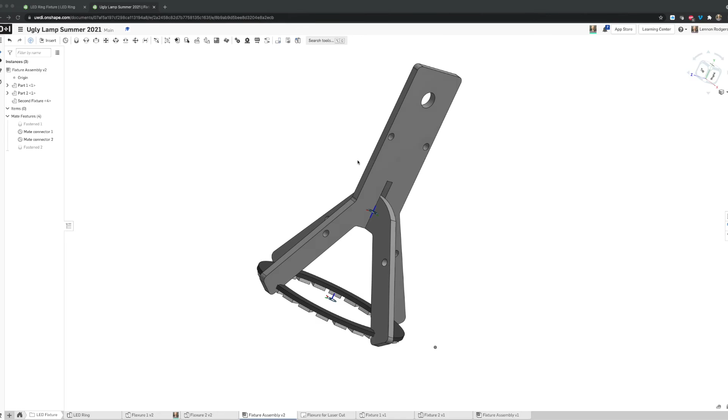Okay, this is the part we will make right now, a little fixture that holds the LED ring. I've modeled the LED ring ahead of time, so I'll give you that to start, so you don't have to make it. But we'll be making these two pieces here. Let me hide some of the pieces so you can see. So that's one piece, and then we'll be adding the second piece there, and that's the LED ring.

The first thing you'll want to do is open up the file called Ugly Lamp Given Parts. Then down here, you'll want to find the LED ring. So that's right here. You'll want to right click and say copy to clipboard.

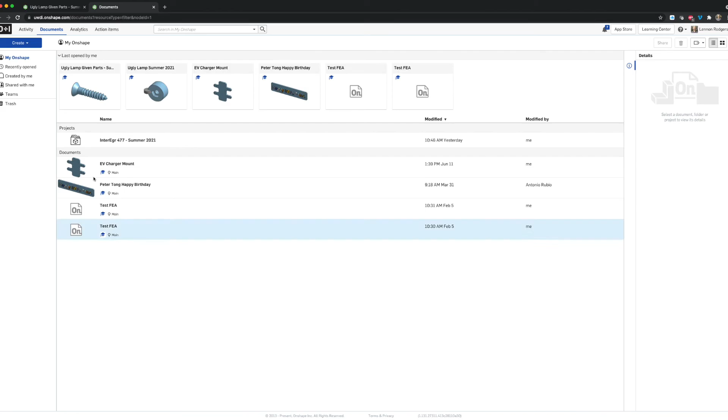Then you can go back to your documents. If you haven't already, you'll want to create a new document, and this will be for the LED ring fixture. This should be either an empty file or you can insert it into an existing file. Then you'll come down here and hit the plus and say paste tab, so that will put the LED ring in there. That just saves you from having to make that ring again. I've made that ahead of time.

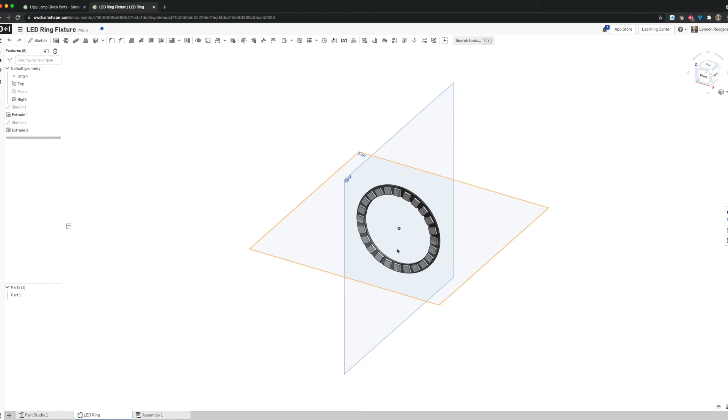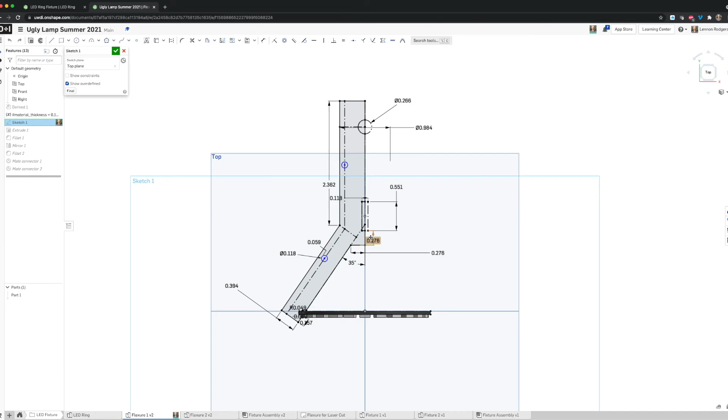This is the first piece we'll make as part of the fixture, and I'll show you the sketch here. So we'll be making half of this arm, and that's a technique that's very useful if you have symmetry in your part. You'll want to sometimes just sketch out half of the part and then use some mirror features to mirror the parts or the sketch entities through some type of center line.

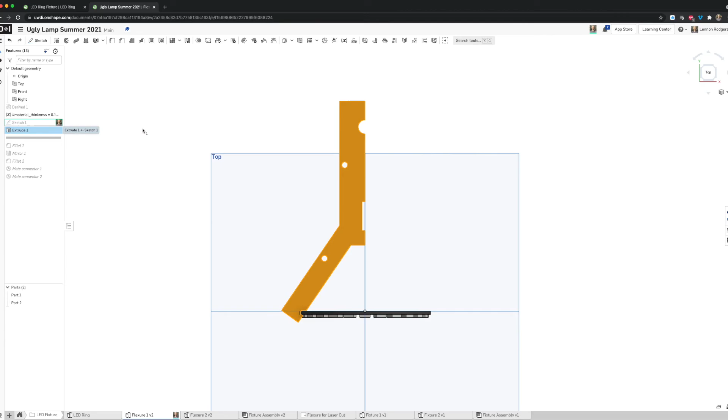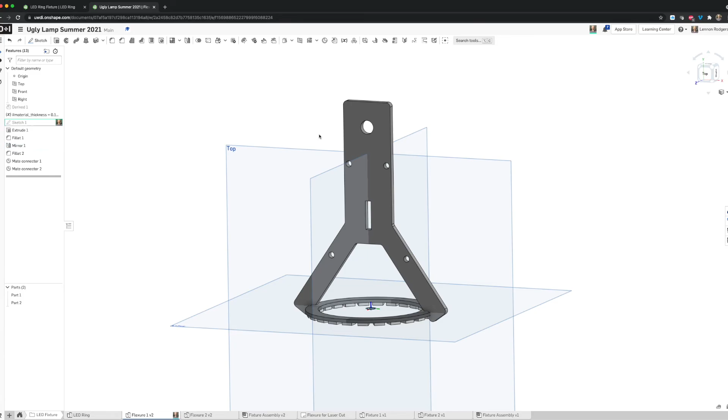So we'll create the sketch. Let me see if I can roll back to here. So we'll create the sketch and then create an extrusion of that sketch. We'll just take the sketch I made, extrude it out, and then use a mirror feature to mirror half of that sketch, and then you'll get the full shape here. Then we will add some fillets, which are just little rounded pieces, and other things to smooth off the edges. These mate connectors are needed for the assembly.

First thing you'll want to do is create a new part studio. So go in here, create part studio, and then you can rename it as fixture 1, LED fixture 1.

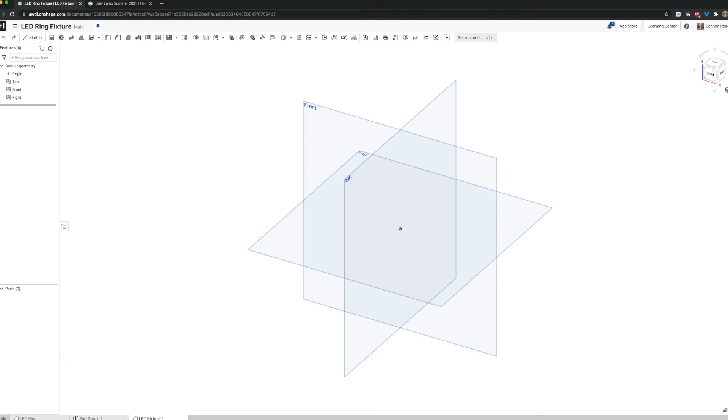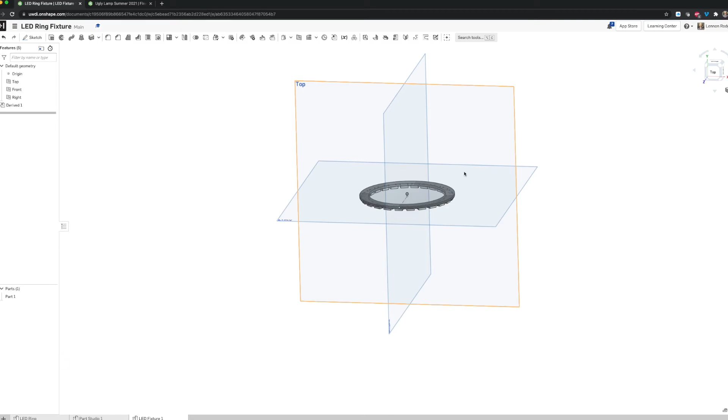What we want to do is bring in the LED part that we had just imported or pasted into this file. So click on this button here that says derived, and then you can select the ring, and that should bring it in, and you say okay. So what that's done is essentially directly brought the LED ring into this file. If I make changes to this LED ring file, it will update and everything will stay according to this same part file.

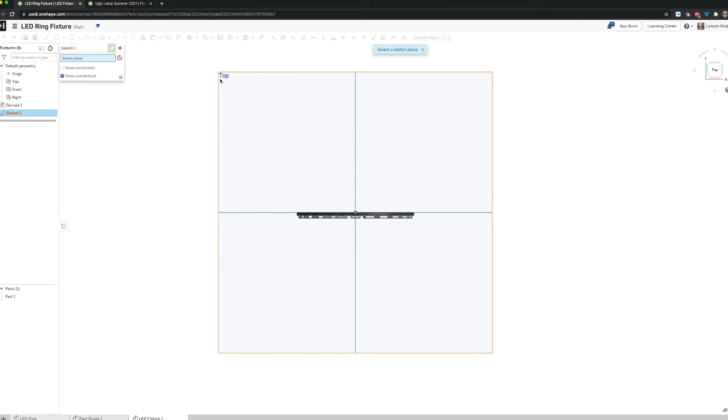So that's what I want to do. Now you can see in my tree over here, I have the derived LED ring. So the next thing I want to do is create a sketch. I click on sketch, and then I'm going to click on the top plane for my sketch.

The first thing you're going to want to do is just use the line tools. Here's the line tool here, and make sure that you click the construction button too, so that the lines are dashed. You'll want to sketch out this basic shape. The reason why I use construction lines, I think of them as the skeletal system of your CAD. I usually create the core shape using construction lines, and I dimension those lines, and then I essentially put a wrapper around them of the actual solid lines.

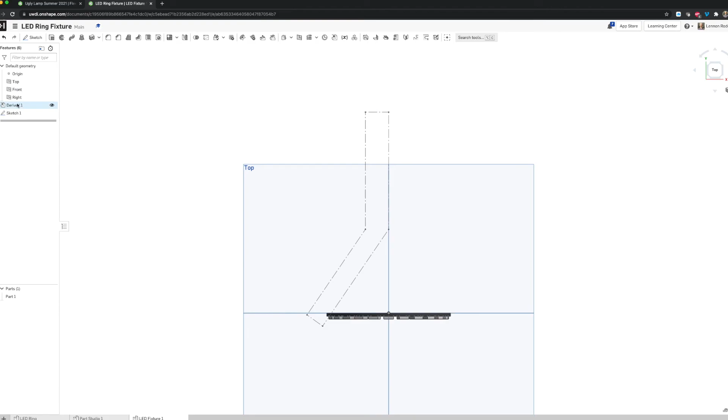I think it will make sense after you have some practice of why I do that. So you'll want to sketch these out. Some of you might have your units off, they might be in inches. You'll want to come over here and go to this horizontal line option, workspace units, and change from inches to millimeters, and then say OK. So double click back into the sketch.

You'll want to add the constraint that this line is the same as this line. So you highlight both of them by clicking one, then holding shift and clicking the other, and hit the equal constraint here.

You'll want to add this dimension, so I'll delete it and add it back. To add the dimension, just click on the line and type in 60 millimeters.

Then you're going to want to add the angle here. To do that, click on the dimension button, click on one line, click on the other line, and type in 35 degrees.

And for this one, you'll want it to be 10 millimeters. Just click on that line, get the dimension button, click on that line, and dimension it to be 10 millimeters. What's interesting is that since it's not fully constrained, you can drag it around quite a bit.

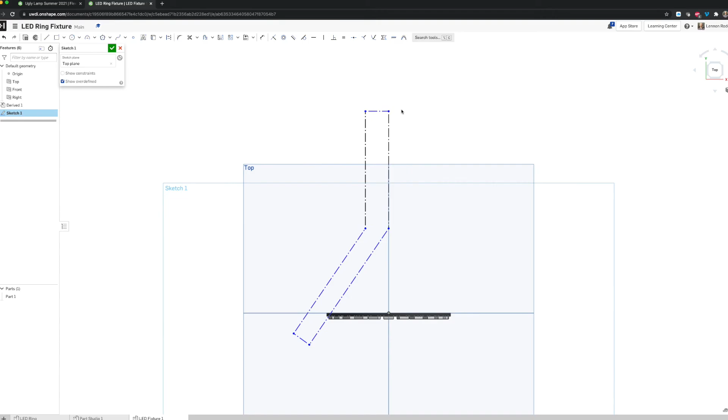So we'll end up adding some other constraints and dimensions in a little bit. Now you zoom in here, and what we want to do is use some of the geometry from this LED ring.

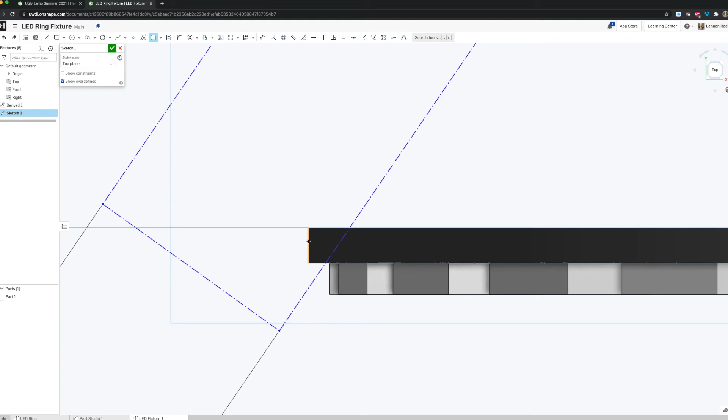The way to do that is to use this convert button. You'll come over here, grab that, and come over here and click on that edge. Now I'm going to hit escape, click on it again, and turn it into a construction line.

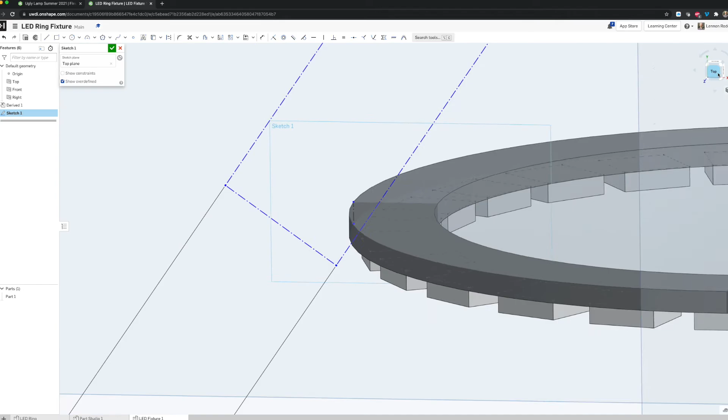So now I have this construction line that's the edge of that LED ring. You could probably see it there, and you can kind of see as I zoom out what we have. It's really nice that you're able to use some of the geometry from that LED ring.

The reason why, as you'll see here, is that we're going to create this arc, basically the little notch that's going to hold in the LED ring. So we're going to come up here and get a 3-point arc.

So you have these different arc options. You get a 3-point arc, and you'll come down here, click there, and click here, just trying to create that arc like that.

Okay, and I'm going to come back here and reference. We want this arc's center to be right on the center of the LED ring, which makes sense. So I'm going to create a center line that comes directly out there and goes to the center of that arc.

And then I will want that to be horizontal. Basically that puts the center of the arc at the center of the LED ring, and you can always drag it around and see how the shape changes.

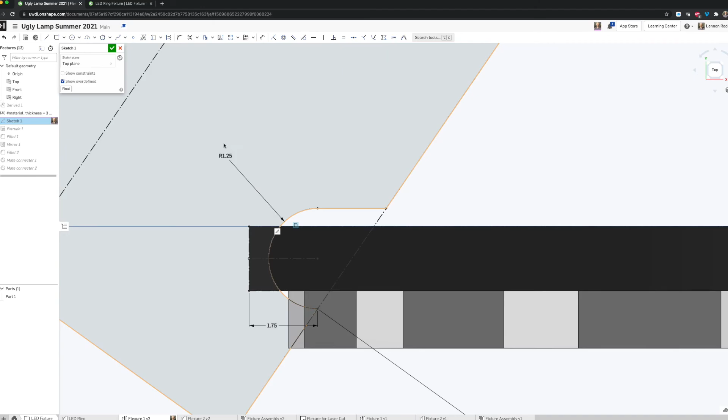Here I've dimensioned it as 1.25 millimeters, so let me go ahead and throw that dimension in: 1.25 millimeters.

And then I will want to extend this line in, because that's what I have here. I want it to come in all the way there.

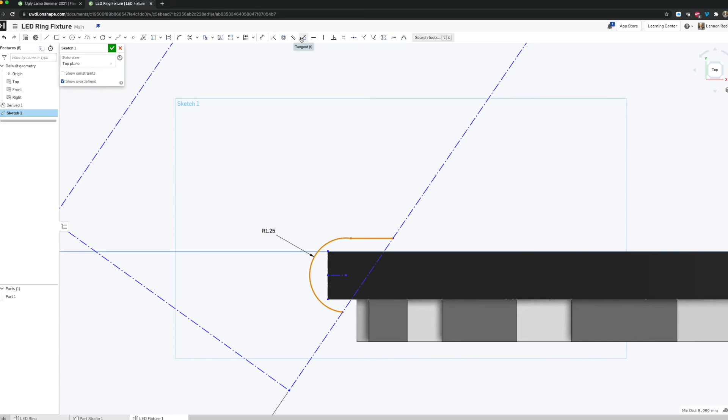And I'll want to make this line tangent with the arc. So I select the line and the arc, then I look for this tangent constraint, and that should do that.

One thing I noticed was that when I converted this line over from the LED, it's unconstrained still, so I need to add a constraint. I need to click this little dot, then click this line, and hit the coincident constraint.

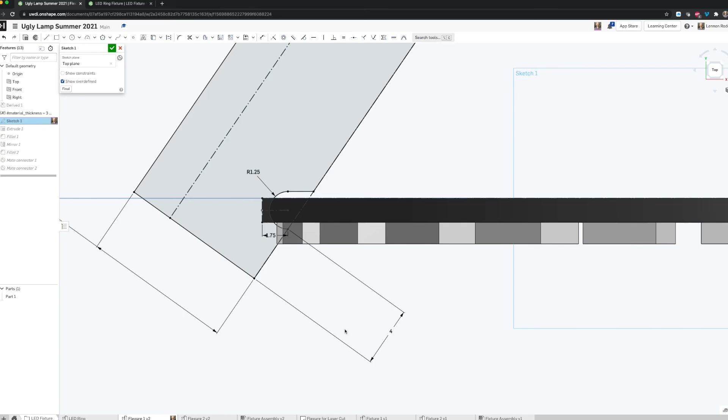And see, that turns from blue to black, so now that's fully constrained. Now I need to add a couple more dimensions, so I'll add that 4 millimeter dimension here.

So I'm going to go ahead and fill this line in because I'm going to be drawing a solid line in there in a little bit anyway. And then I'll go ahead and dimension that line, holding this, to be 4 millimeters.

Okay, so another issue that I had can be solved by making a hidden line or construction line that goes from the top here down to the bottom of the arc, and then clicking on that and making that vertical. You can kind of drag on it and see, but this essentially constrains the arc the way we want it.

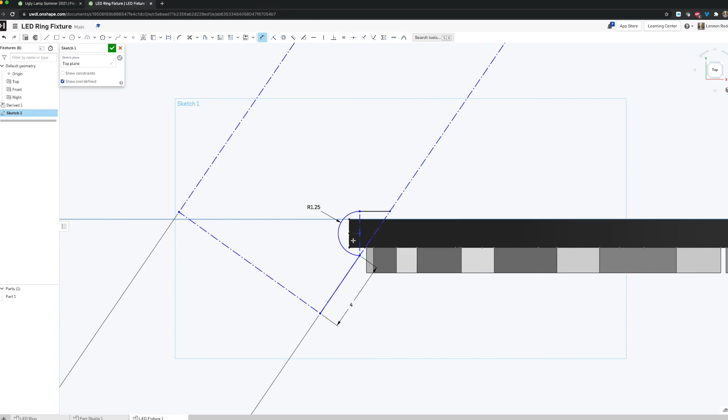And then we need to add a dimension for basically the back edge of the LED. Let me get the dimension—there we go. We want that to be 1.75.

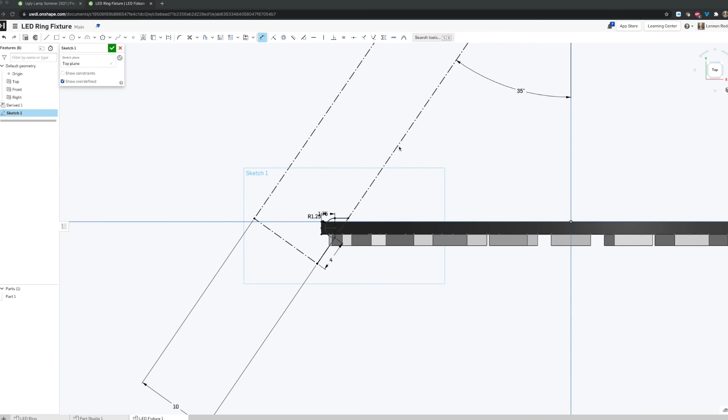So what happened there is pretty much all the lines and points turned from blue to black. That means everything at this point is fully constrained.

So this is the overall shell, the skeletal system we need for the CAD, and you can see here that this is what I eventually want. I need to add this horizontal piece, so I'm going to go ahead and add that, and then sketch around with solid lines.

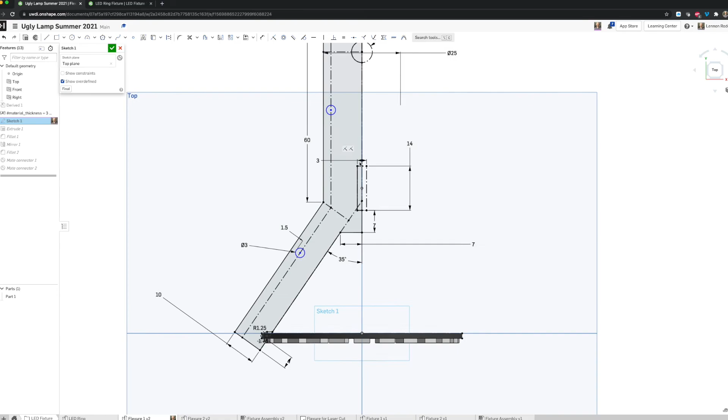The overall shape. But I also need to add these circles and this rectangle, so let me go ahead and do that too. Let me add these.

So I can come up here and create a solid line. It's going to go from here over to here. And then it looks like we want that dimension to be 7 millimeters across.

So I come here and dimension it 7 millimeters. Okay, and then I need a circle up here, and the circle placement looks to be just along this line here. So it looks like I can create first a hidden line or a construction line.

So grab the circle, go construction, create the circle here. And then the question is, how is it positioned? I think what it is here is that it's equal distance from each side, so the length from here to here is the same as the length from here to here. That's kind of a geometric constraint.

So what I can do is create a line that goes across there and make that a construction line, and then make another line that goes from here up to the top. I click on that one, and then I hold shift and click on that one, and then I make them equal. And that will position that circle.

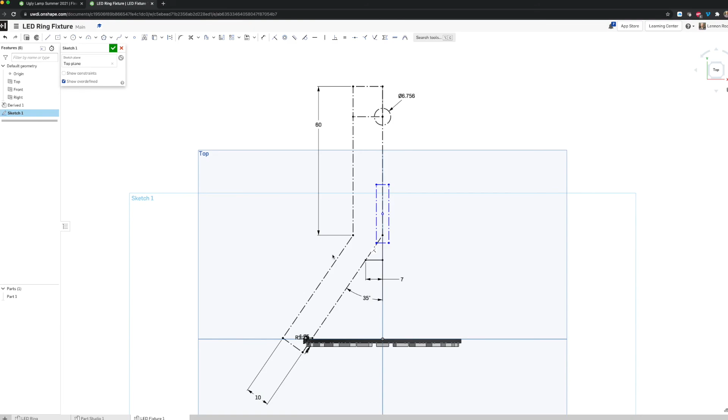And then it looks like I can just click up here and create this rectangle. And then the dimensions are set by the bottom of the rectangle being 7 millimeters up from this line there. So dimension that to be 7 millimeters.

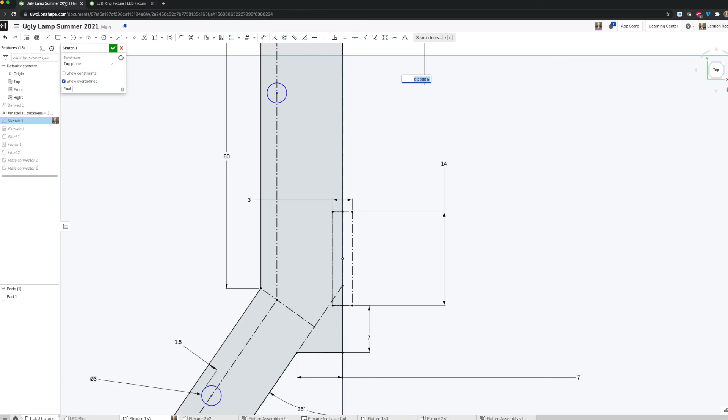And then the overall height is 14 millimeters, and then the width is 3 millimeters.

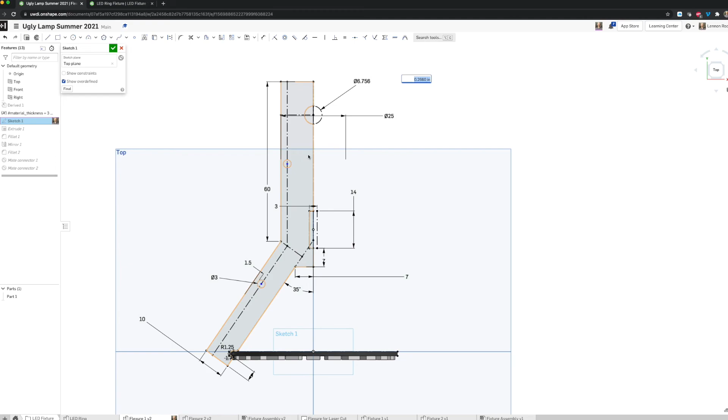Okay, so now I need to come through and add the solid lines, because I believe here I now have all the key dimensions already specified. So let me come back here and just sketch over these hidden lines with solid lines. I come over here, come down here, and just create the lines.

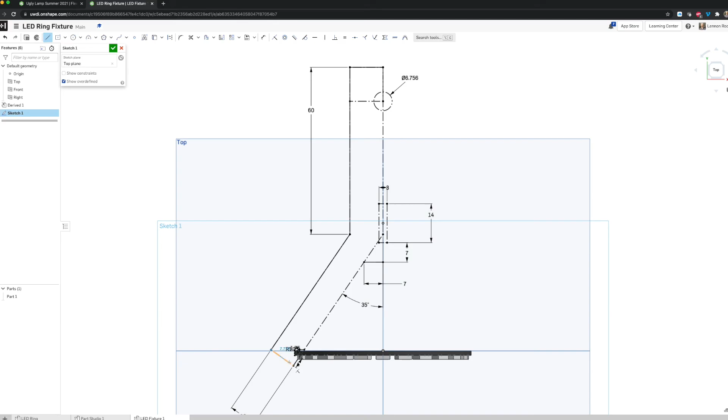I have to zoom in here. Well, I've already made that one when I dimensioned it. So I click here, going up to this line. That one's already a solid line. So I come up here, there, and then I just trace out.

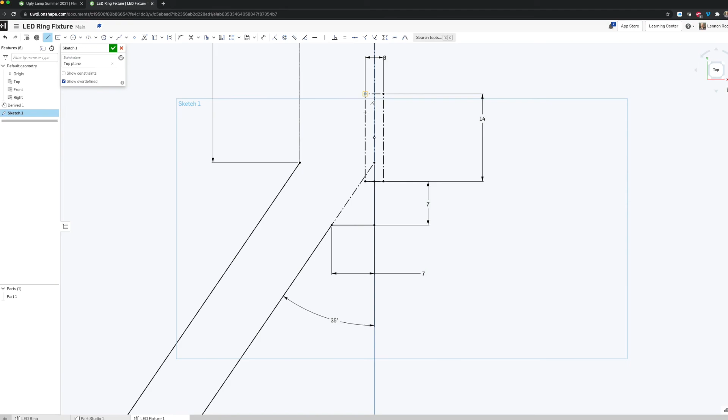So that's why these construction lines are really nice. Let me make sure that I got that one. Yep, I did, but I'll try it again now.

Okay, and then I want to create that arc. So to create the arc, I can do it a lot of different ways, I'll just do...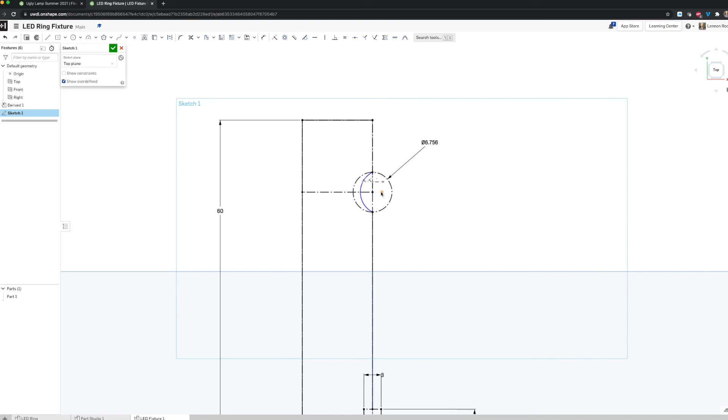Let me try, it should be a 3-point arc, so I should be able to click here, here—oops, let me try it again. Let's click the arc. And then I can left click and drag that right into the center. And then you should have all black lines and arcs.

Okay, now that we have the sketch, we want to make the extrusion. In order to extrude a sketch, you should see that it has to be grayed in. So if you don't see the gray that encloses these outer lines, that means one of your lines in there is still hidden and not made solid. So you have to add that solid line, and you should see this gray.

Once you've done that, you can click on the sketch and then hit extrude. There are a lot of different options up here for extrusion, so you can do new, you can do add, and so on. We want to do a new one, going 2.5 millimeters in one direction, but we actually want it to go in two directions to be 5 millimeters total. This is just kind of a minor detail.

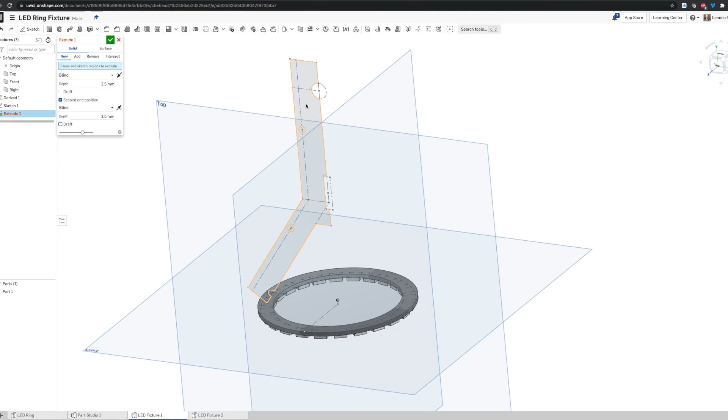So I can click on the face of that sketch, and then I say OK. So that looks pretty good.

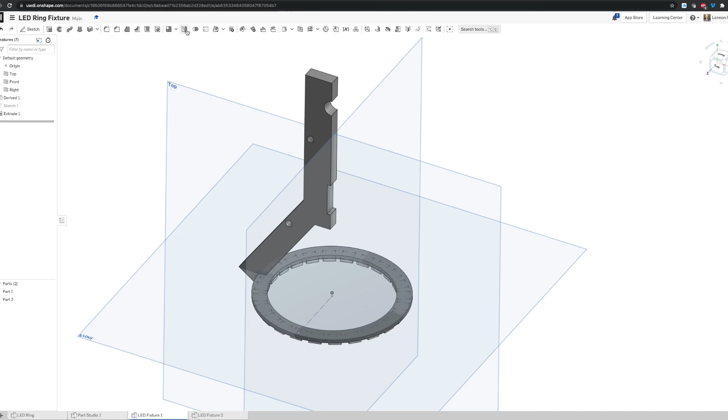Now I want to mirror. So I go to the mirror feature, click entities to mirror, click on that, and the mirror plane is here. Then I want to merge with part 2.

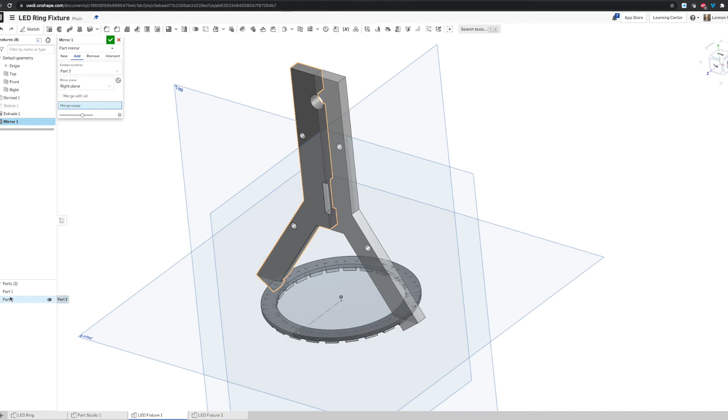In the settings here, you can see new, add, and remove. In this case I want to do add, and merge with part 2, because that's the other half. So now it's a solid.

You should really just have down here in your part tree, part 1 and part 2. Part 1 is the LED ring, and part 2 is this part that we just added. So that looks pretty good.

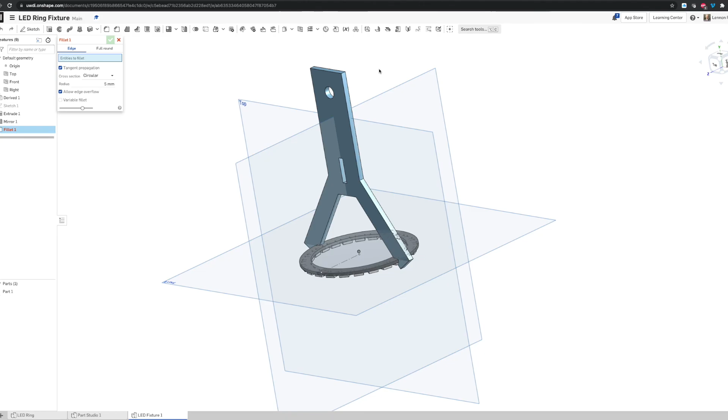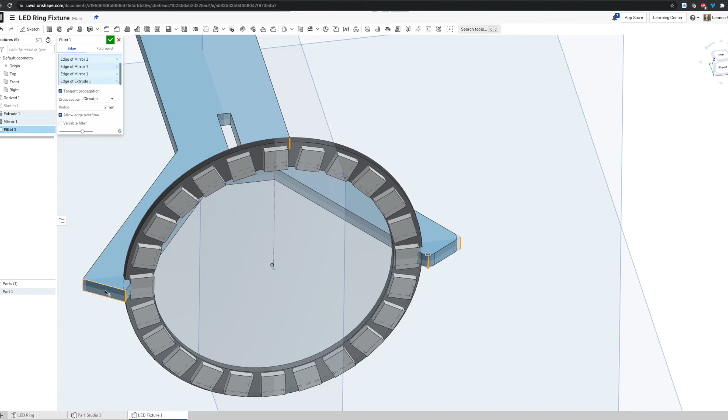Now I'll go back and put some fillets, just rounding the corners. I click the fillet, and then click on the edges that I want. You can put 2, 3 millimeters, whatever you'd like, and experiment with it. Just click on the edges that you want rounded. I could have done this before I mirrored it if I wanted to.

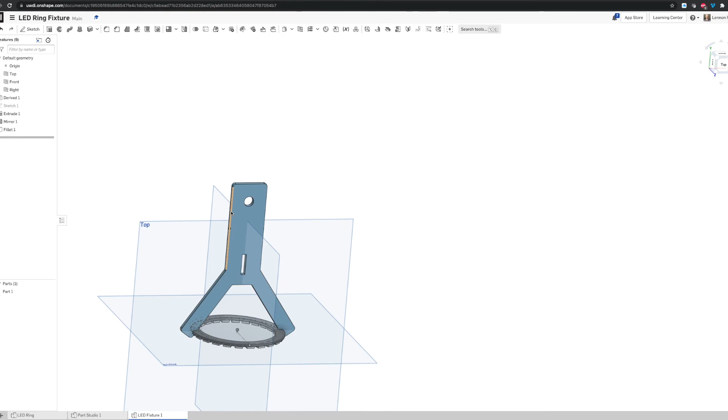I'm going to go back and add these holes on the side, which will be used for zip ties, to zip tie your wire. This is just an example of how you can go back and edit a sketch. So I double click on the sketch and zoom in there.

I can come in here and make some construction lines across that one. Then I want to come down here, and it doesn't have to be specific. Like I said, these are just for zip ties, so just put in something reasonable.

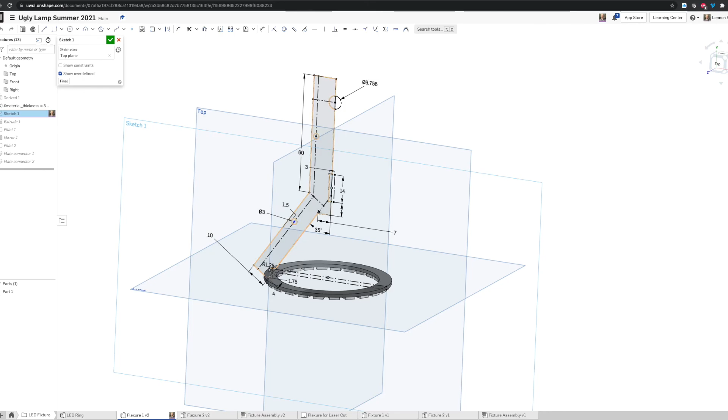You do have to add a couple of constraints here. You have to make these two lines parallel, so come up there, parallel, and then you do have to set the distance from the edge. In this case I had 1.5 millimeters from the edge and a 3 millimeter diameter circle.

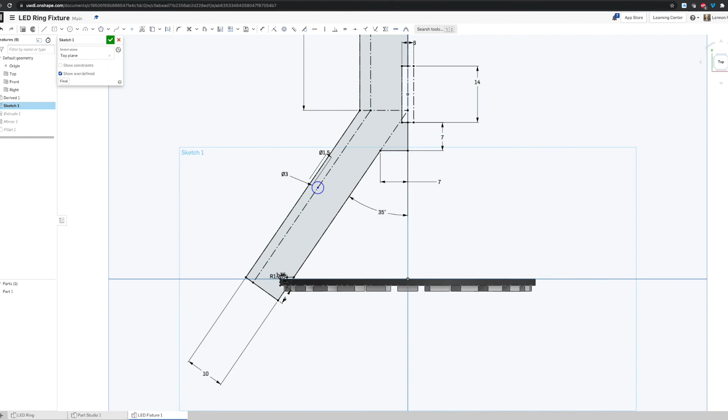So I need the circle in there first. I come in here and dimension this to be 3 millimeters, and then dimension this to be 1.5 millimeters from the edge. This can be dragged anywhere - I didn't really even specify it in my file because it's just approximate. You can just put it up here, where the zip tie will go.

And then we need another one up here at the top, which looks like it's kind of on the center line. So I can create a circle and put it right in the center, then make this one equal to this one down here - highlight both and hit equal. That should do it.

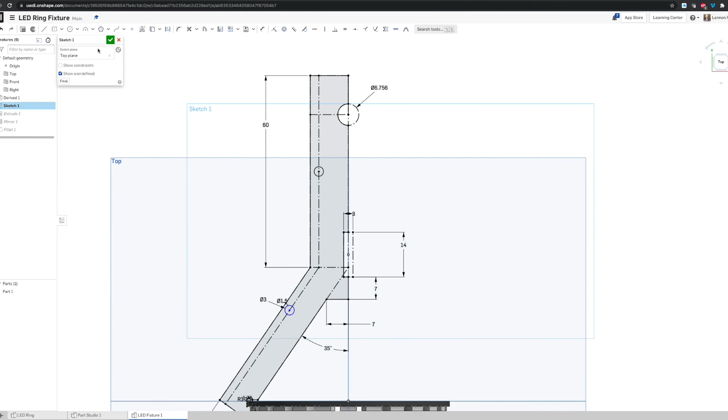If I say OK, the holes will already populate on both sides because of the mirroring. That's a nice aspect of it.

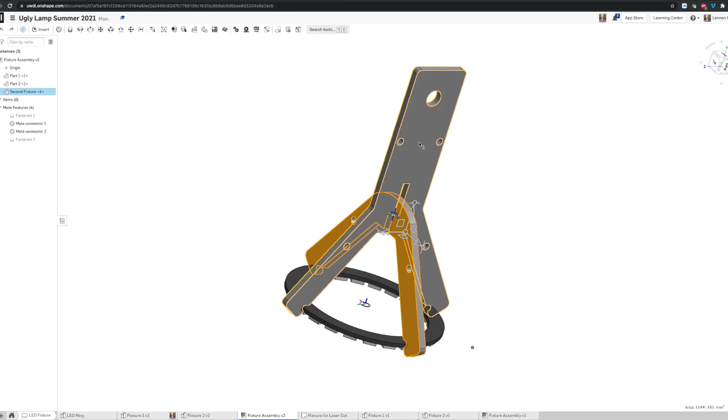The next part we're going to make is that second piece. I can look at the assembly here - it's this piece right here. We're going to make it based on the same geometry, leveraging what we've already made to create this second one.

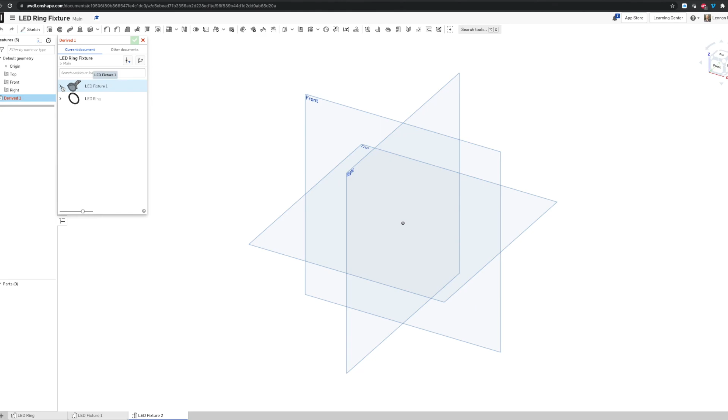So you'll want to come over to your part and create a new part studio. I'll call this LED Fixture 2. Then I'll do the same derived feature as before - click the derived button, which is here. That pulls in the geometry of part 2, which is what we want to bring in.

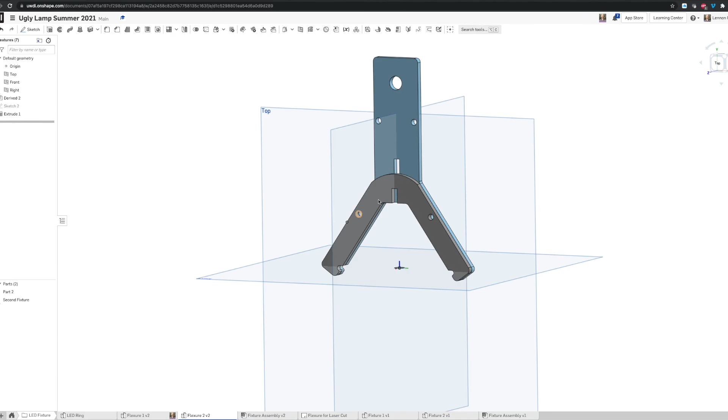This allows us to essentially utilize this geometry, and you can see this is what I did over in this part. I'm going to build the second piece right on top of that first piece, but in the end we'll only use this piece. It's a really slick way so I don't have to recreate the whole geometry. So I'll create a sketch on the face of this part.

And then what I want to do, I can do this a couple different ways, but essentially I want to extract the curves from this shape that we've already created. So it's that same use tool, and I can just click individually through them all, or I could just highlight them all and it will get them all. So I can go ahead and do that, click that one, and it gets all those. I think it got all of them.

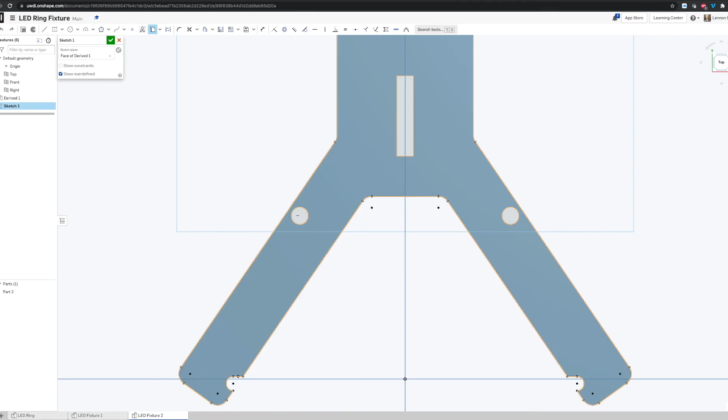I'll just want to also get these other lines. So let me click on that again. I want to get the circles. So I think we're good there.

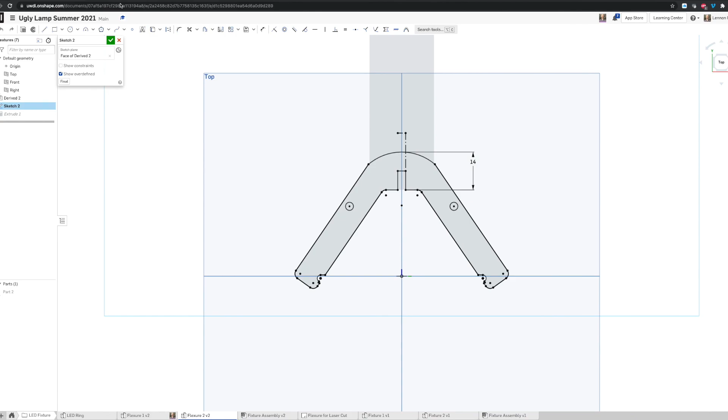And I want to convert this line to be a hidden line, and I'll show you our construction line, because I actually want to modify that a little bit. So there's that, and then I want to add an arc, and this will all be apparent in a little bit. So add the arc there, and the dimension I want to give that is 14 millimeters. So I'll dimension that from the arc down to this line, and we want that to be 14 millimeters.

So the next thing I want to do is add this little notch that will slide in. So I create the rectangle, and then I made that hidden so I can fill in this line here.

Okay, but as of now, this thing should be able to slide around. So what I want to do here is create two constraints. One is that this should be coincident with that line, and that will bring them lined up, essentially collinear. And then do the same thing on this line. Select these two lines, and then make them collinear.

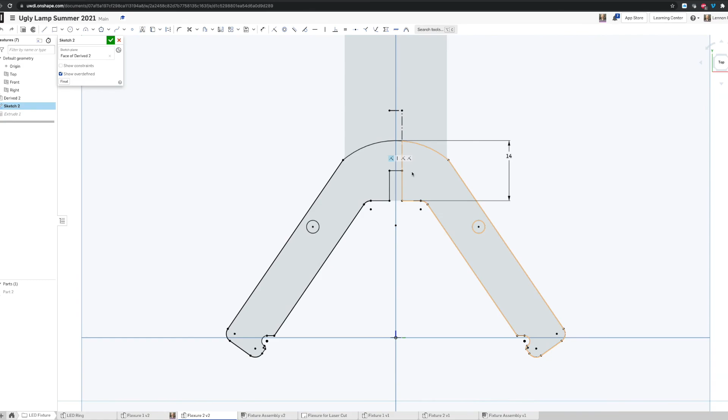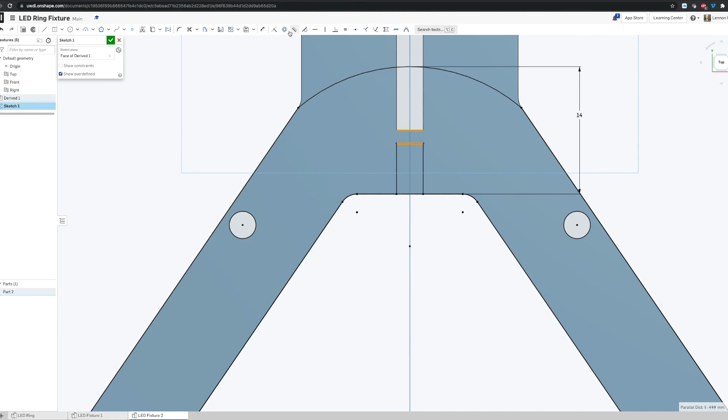And then the final dimension that I need here, let me see if I can see it. Yeah, I want this to come all the way up to the very bottom of this, all the way up here. So the way I can do that is click that line, and then make them coincident. So that's this coincident constraint. And then everything should turn black.

And it does. So if I say OK, I can now create an extrusion, clicking the extrude button, and then I can click on the sketch. And then it turned red, I think because it says add, and I actually just want to do a new part. I don't want to add to this back part.

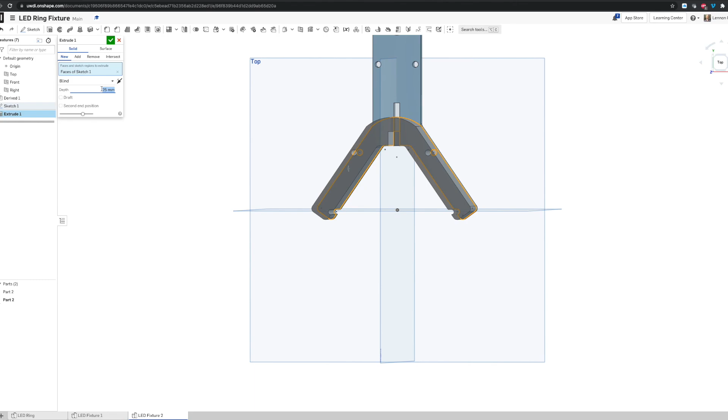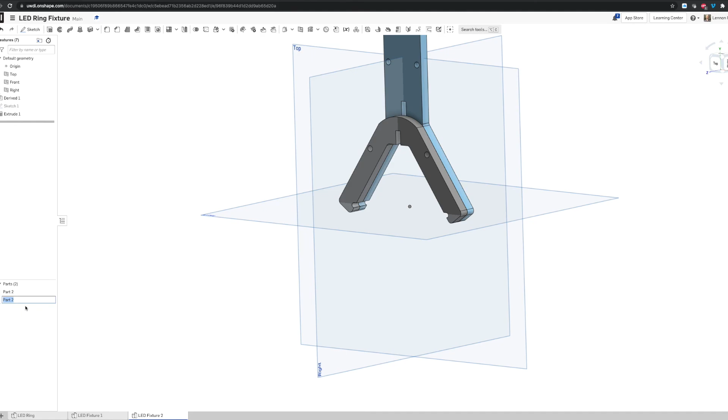And then, like before, I can do the 2 directions, or just the 5mm. So I'm just going to do 5mm for the thickness, and then do that. So you can see here that I have 2 parts. That's the back one that we started with, and this is the new one that we created. And I could rename this part as Fixture 2, so I know which one it is. And then I can hide this one by not showing it.

Okay, next I'd like to be able to make this assembly. So to do that, you need to use mate connectors. This is what it'll look like in the end. I'm going to go back and show you how I did this. So to make the mate connectors, they're basically the points at which you want to connect 2 parts together.

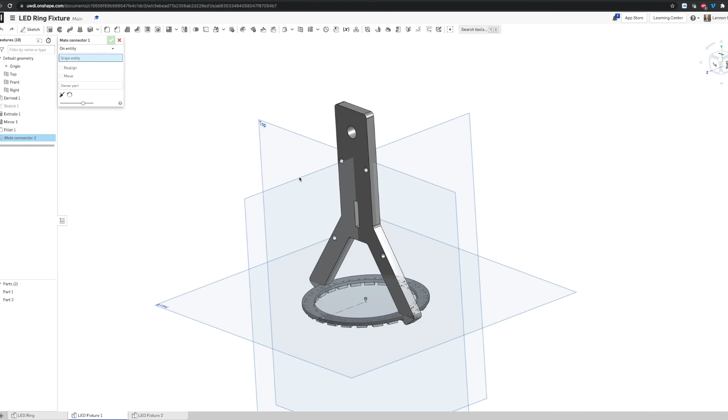So I need to first create a mate connector in my individual parts. If you look up here, you can see this mate connector. And then you can click there, and say owner part, and I want to put this in part 1. So I click part 1 and say OK. And then I create another mate connector.

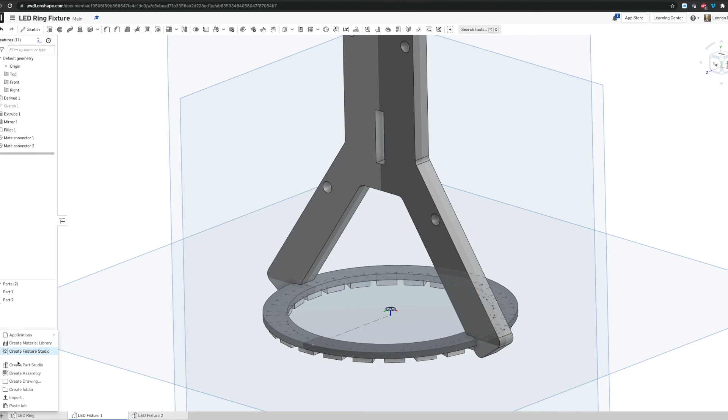Actually, do the same. This will make sense a little bit later. And then I want to say OK. And then I can come down here and create a new assembly. An assembly is essentially putting multiple parts together. And I can say insert, and click on that and say OK.

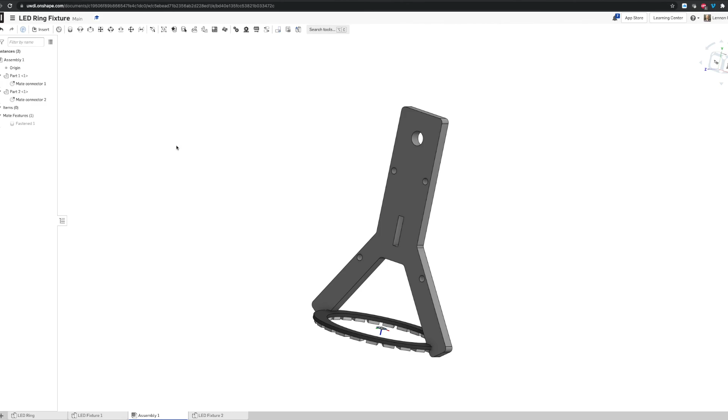And then I'm going to want to add these mates on there. So I'm going to do the fasten mate, and I'll do mate 1, fasten to mate 2, say OK, and then I'll insert the other part, which is this LED fixture 2. And actually, I just want to bring in fixture 2. I don't want to bring in this one, so I'm going to delete that.

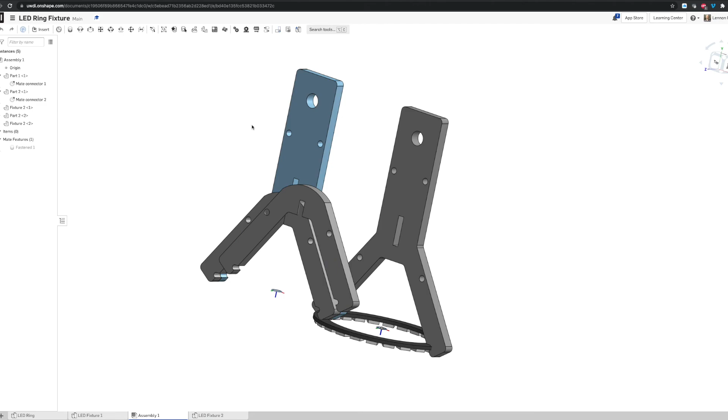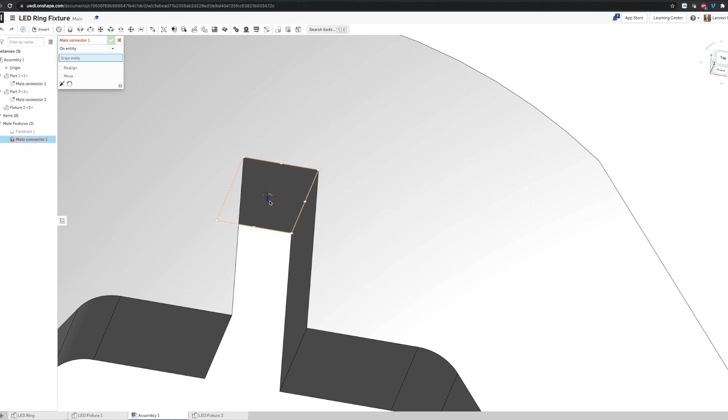Let me see. Okay, so this one got brought in. I'm just going to delete this, and delete this one. Okay, and then what I want to do here is I need to add a mate connector up here, because I'm going to mate this surface to that area over there. So I add a little surface mate connector there. Say OK, and then come over here and create a mate connector in there.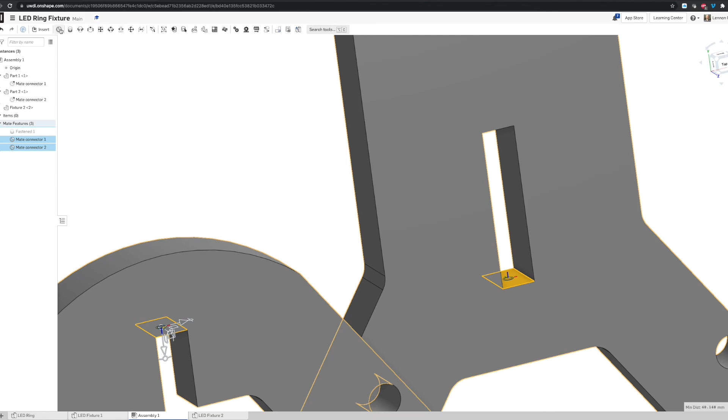Say OK, and then I can take both of these and do a fasten, but I need to rotate it around. So I do that rotate, and then say OK. So this is the assembly.

What's good about doing that is you can see here that this thickness is off, so this must not be the right thickness. I'm going to go back and change that. I'll go back to the individual parts, go to LED fixture 1, and look at this extrusion - it looks like it was 5 millimeters.

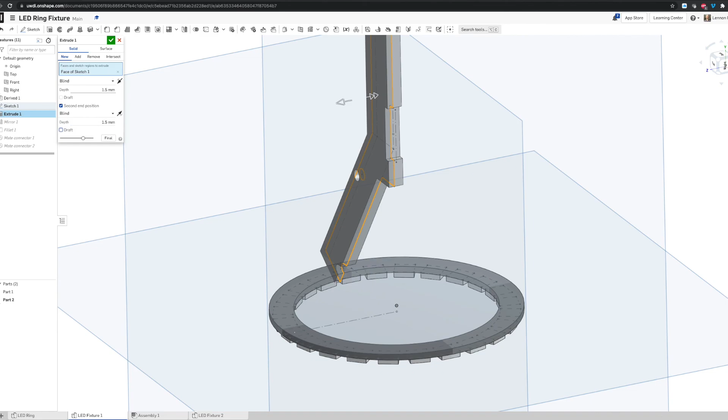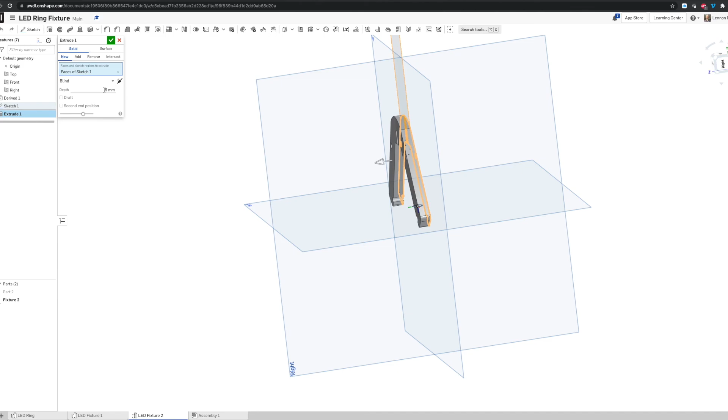It should have just been 1.5 millimeters in each direction, which will be 3 millimeters total. So I can change that, and then I come over here and I want to do fixture 2. So I go to fixture 2 and look at that extrusion, and that must be the same. Yeah, and I really wanted 3 millimeters. So sometimes you make these errors, and it's nice - you can come back and check it and do a quick update. So it automatically updated, and you can see here now it all fits together.

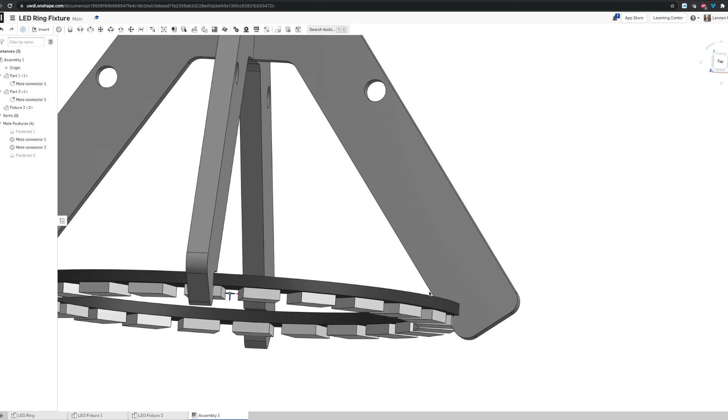You could analyze it more, make sure everything's correct. You kind of come down here, and this looks correct, even though it's interfering there. It's actually what allows the LED ring to be held pretty tightly as it kind of flexes back and then pinches it really well.

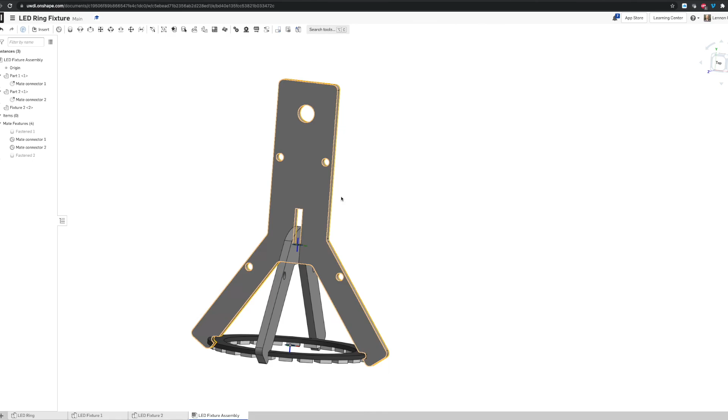So I can rename this as LED fixture assembly. And the next thing I want to do is create a two-dimensional drawing that I can use on the laser cutter to cut these two files.

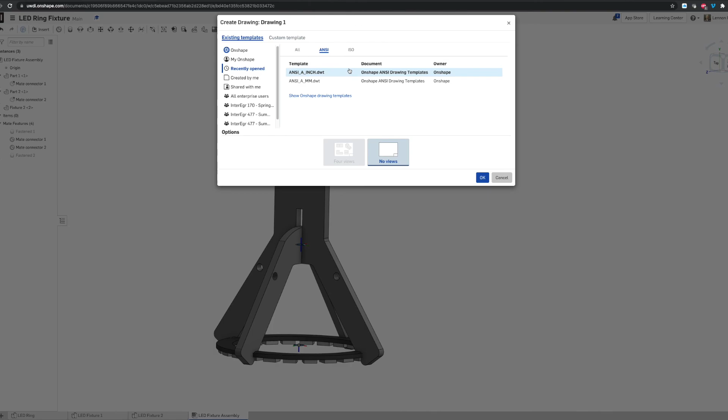To do that, you go down here and click Create Drawing. These are the different template sizes, so it kind of depends on what you've made so far. You can go to ANSI and ISO - I'm going to just click on one of the millimeter ones. It doesn't matter, you can check what the different sizes are, because we're going to delete everything anyway, though the overall size changes for the different template sizes.

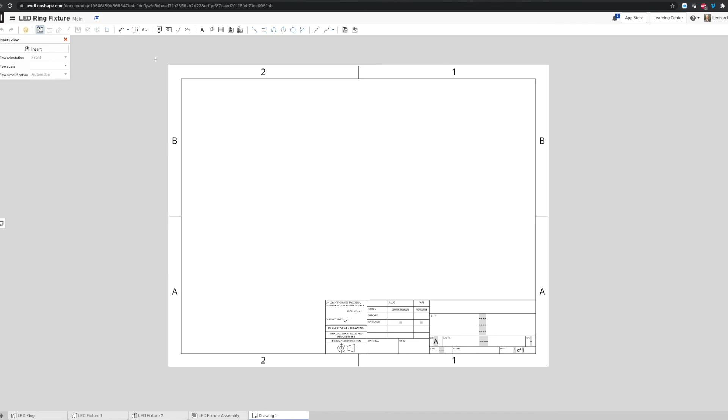So I'll exit out of this. Imagine you've got this drawing here. I'm going to first delete everything, just getting a blank sheet, and then I'm going to insert, and then I just want part 2.

Now you can see here that you got to check to make sure the scale is 1:1, and then you got to change the view orientation until it gets to the large rectangle. That's kind of what we want. That's just switching to the different planes.

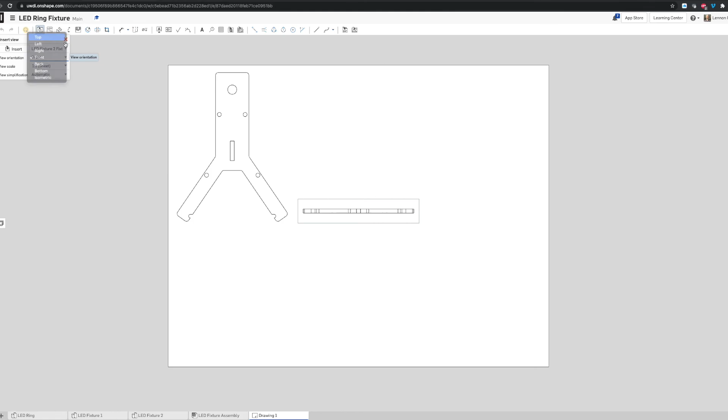So you click there, left click, accept that, hit escape, and then insert another part - I want to go to the LED fixture 2, click that one, and again make sure it's 1:1 scale. It looks like the top view is what we want, and just position them pretty close to each other, because we'll be cutting them on the laser cutter. You could also nest them down like that, so that might be a good way to do it too.

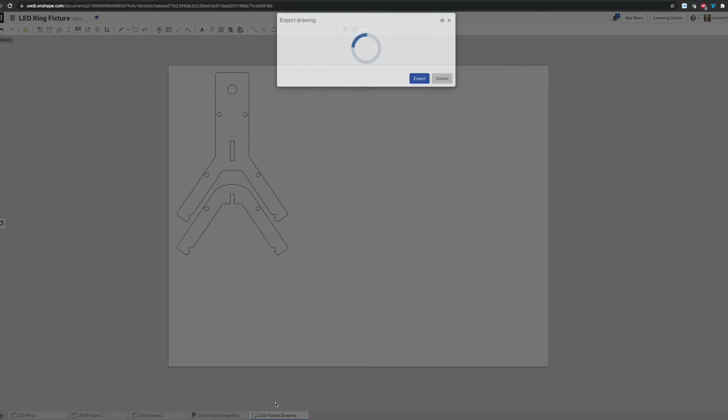Okay, so then I can come down here and rename that LED fixture drawing. And then what I'm going to want to do here is right click and export, export as a PDF - you can see where you want it to save it, and just the name is fine, and just hit export.

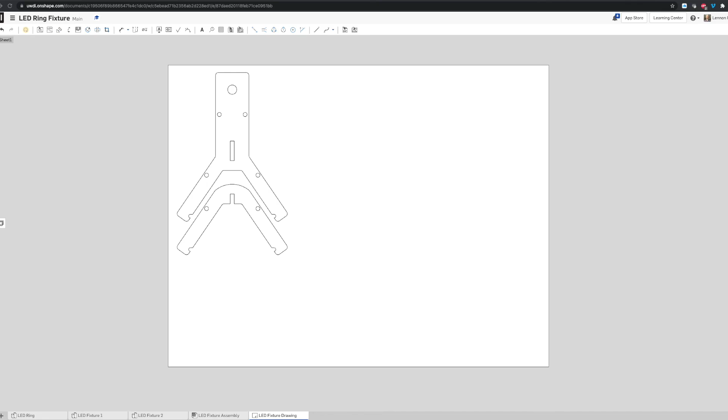Okay, that did that. So now I would want to go inside of Illustrator and change the line type, so I'll do that. I want to get the selection tool, select all the lines - it really depends on how yours is set up, whatever computer you're on, but you basically need to change the stroke or the thickness of the line.

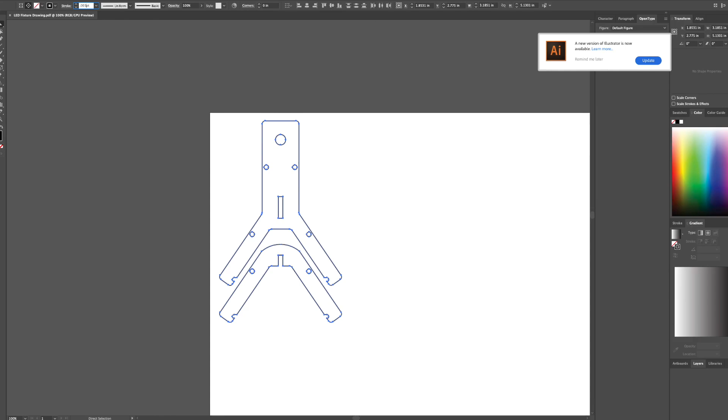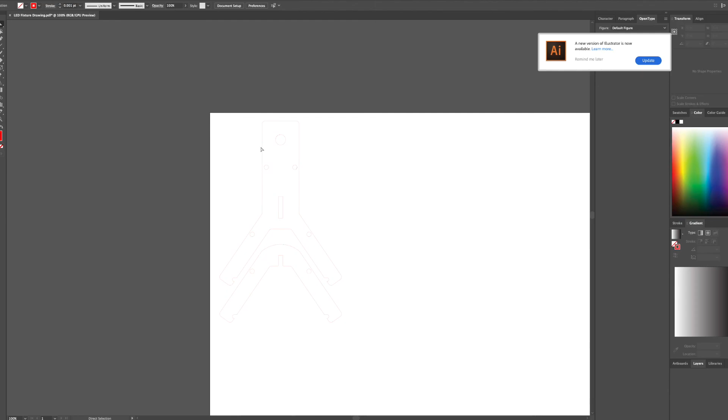To 0.001, and then you need to come over here to the color and pick the color as red. Okay, and then again, you got to make sure that's 0.001. Okay, and that's it - it's just changing the line type, thickness, and the color red, with 0.001. And then I save it, and then I should be able to open it up on the computer with a laser cutter and send it directly to the laser cutter to cut it.